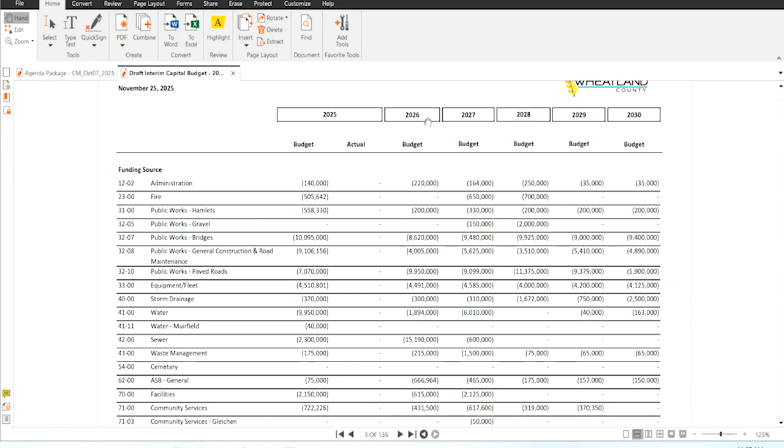So I'll just quickly touch on the summary at the start of the capital package that you received. So you see a summary by division, the total capital for the current year, the actual. This is the funding section, so that's why you don't see any actuals there right now, because we don't fund things until we do our audit for the current year. And then the remaining 5-year plan forthcoming here. So our focus right now is the 2026 one.

This is a summary of the funding methods. And then I'll just touch briefly, as we saw in the PowerPoint presentation, this is our list of capital projects with the criteria of deferrable with impact or the type of capital that it is. And we have some notes in here. So when you have time in the evening and you want to do some light reading, you can review this and it'll keep you up at night.

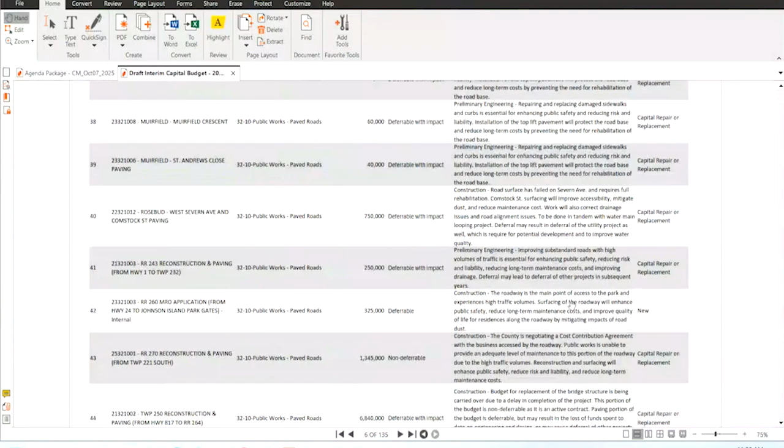Okay, so we'll go to the first section, first project page. To Harry, come up and talk about his project.

Morning again, Harry from administration. This project is fiber. We're looking to add a fiber line from the administration building to the agriculture building to public works. We did separate this because it's related to another project, but it's possible we don't have to use the full funds. There is an existing conduit, but we're not sure what condition it's in, or if we're able to fit a new fiber line, but we're looking to improve the connectivity. So this budget is contingent on the existing conduit not being able to accommodate a new fiber line. So we're looking to improve the connectivity between the three buildings. Let me know if there's any questions.

Seeing none, I'll move on to the next line. This is the usual IT equipment line. This year is a little special for computer replacement. Windows 10 is no longer supported, meaning if there's a security vulnerability, they're no longer updating it. So just a little note for everybody. We're looking to upgrade any machine that we're unable to upgrade to Windows 11. We're looking to replace, so there's a little bit more machines than usual that we will need to replace, but that's just what we're given. So other than that, the usual mobile asset replacement, phones and tablets that go on the vehicles, and then infrastructure assets. You saw some of the offsite improvements that we did last year, we're looking to continue that into the rest of our facilities. Let me know if there's any questions. Seeing none.

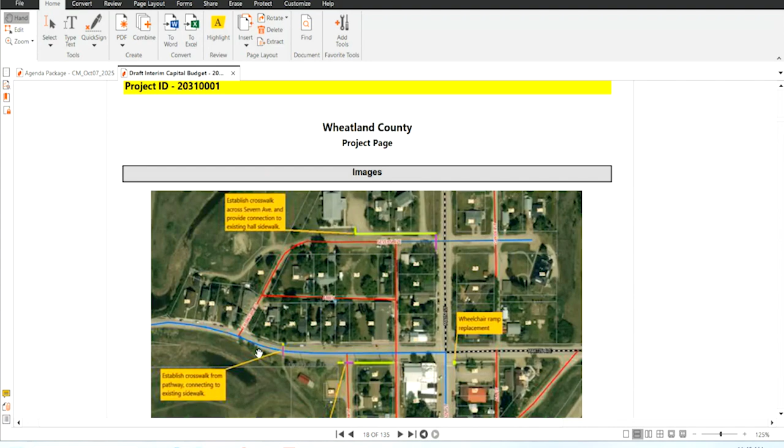There's a little image we put together for this year's. We kind of do the hamlets on a rotating basis — one year we'll do Carseland, next we'll do Gleichen, Cluny, kind of mix them up. So there's a big push in Rosebud this year — replacing with some wheelchair ramps, connecting the community hall to the rest of the sidewalk system that it's not currently connected to, and some crosswalks and things for the pathways that just walk out into the middle of the road. That's that in a nutshell. There's a big push in Rosebud this year, and you'll see that theme through here, because we haven't done a lot of work there the last few years as far as infrastructure goes. This will tie into some pathway stuff and some road stuff you'll see later on as well. Really, the big thing about grouping some of these projects together is because they are so small and so far out there in the middle of nowhere, we get a bigger bang for the buck the more we can do in one shot.

And the next section is gravel. There's nothing for this year within the gravel budget. We keep a placeholder on there for a future pit purchase, because that will be coming down the road at some point, as we are getting to end of life on some of our pits.

And then we get into the hot topic of the day, bridges — my favorite topic to talk about. I've spent a lot of time on it. I have some maps that I'm going to ask Shanna to hand out. It'll make it a little clearer for everyone to see the number of projects we have coming down the pipe for bridges. As discussed multiple times, and specifically in that report that came earlier in the year, we are ramping up spending on bridges. That's become a big focus. We recognize that it impacts the ratepayers, the network, businesses, and everybody. So we are ramping that spending up.

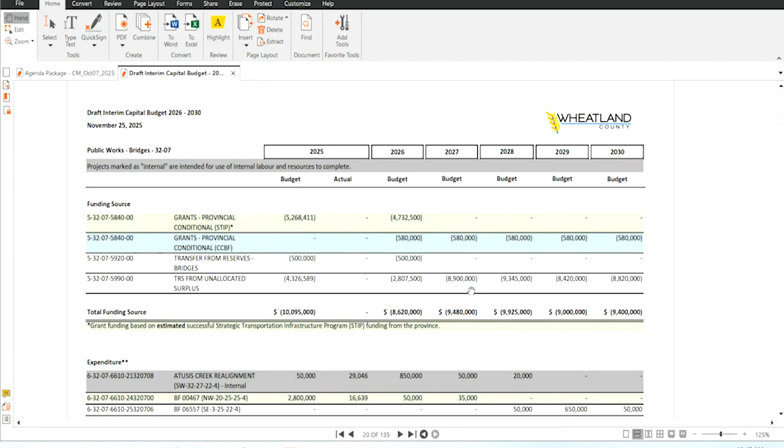Yeah. Some of those bridges, can't we replace them with culverts, or what's the difference in price of a big culvert to a bridge? No, that's a great question.

So for the newer councillors, the bridge file program refers to bridges and bridge size culverts. A bridge size culvert is anything that's 1,500 millimeter diameter or equivalent flow capacity - that could be two 1200s, could be a 1,500 or bigger. So we get up to like twin 4 meters, very large culverts.

The bridges, we have two classes - our major bridges and our standard bridges. Standard bridges are quite small, those really short ones you see. Most of those we can replace with culvert.

As a mandate from council over the years, we like culvert. It's cheaper, it's less maintenance, but it doesn't last as long. But when you factor it out over the life cycle of the bridge, generally that life cycle cost is cheaper, even though you got to replace them more often. So as a rule of thumb, we like culverts, we like to install culverts. We can install CSP culverts internally, which we can do for 40 to 50% cheaper than contractors on average. We're really good at it, we've been doing it a long time, so we like doing those.

Anything that's a structural steel plate or anything bigger, we contract out. Bridges themselves, definitely contract those out. So yeah, anywhere we can put in culvert, we will.

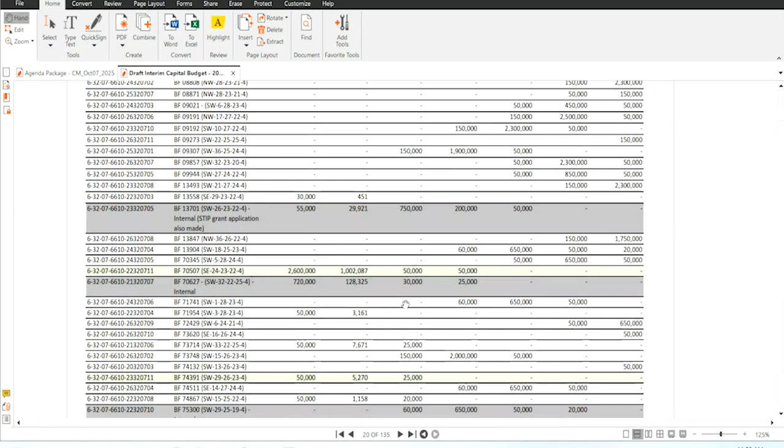I'll try and get through these before lunch, so I'll talk really fast. As you can see, the list has gotten quite long. The reason for that, these are all in various stages of post-construction, prelim construction, whatnot.

So quite a long list. Just what we touched on before, that spending total is going up just under 10 million a year for the next 5 years. So significant ramp up.

First one is the Atusis Creek realignment. This is to replace a 3,000 millimeter unregistered bridge file on Range Road 225 between 274 and 280. Also to move the creek away from the road so it quits washing the road, and improve the sag curve, because it's quite a dip through that section. Unregistered, again for the newer councillors, means it meets the criteria of a bridge file but was never registered with the province. As we replace these things, we register them, they're in the inspection system, getting inspected regularly. I think in the last 5 years we've found about 10.

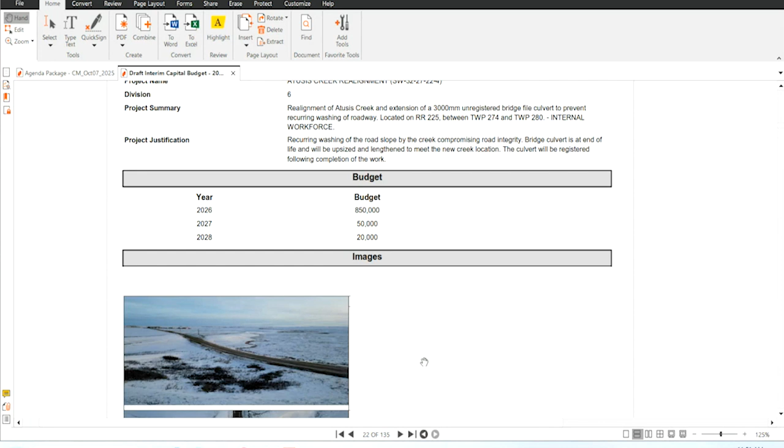So that adds to our asset management program. We got 10 more of these things that we didn't know we had. We're getting to a point where I think we've caught them all. So this one is to be constructed next year and completed with internal forces.

Bridge file 00467. This one is under construction right now on Range Road 255. This is post-construction for next year, and we do have a STIP grant on this one for 75% of the project.

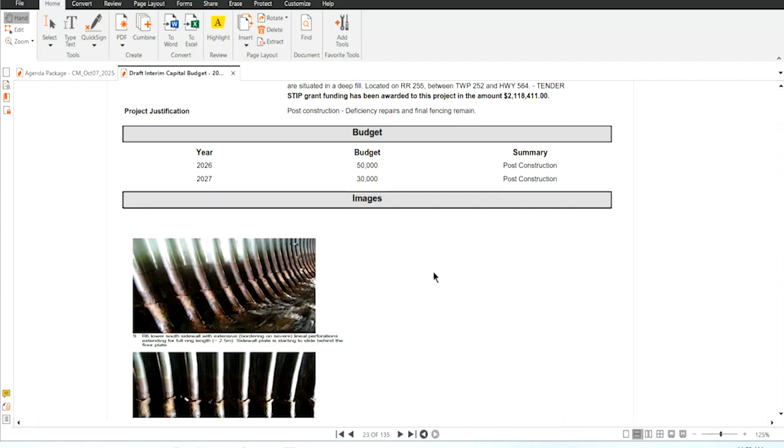So can I ask why, when we redid the road 2 years ago, we didn't do those bridges? That's a very good question. I think that road was done, I want to say closer to 10 years ago it was rebuilt.

At the time, when they inspected them, they figured they had more life in them than they did, I assume. I know we went in a few years back and put extensions on them. So again, at the time, they must have been in good shape, or at least they assumed they were. What happened is a recent inspection went in there and discovered that all the haunches of the pipes were totally rotted out and cracked, and so they were starting to collapse. As a rule of thumb, I replace everything as I go through a road project. Don't like going back, it's way more costly.

Sorry, go ahead. Through the chair, I just wanted to add something from an asset management perspective. As these are brought into the asset management program, one of the goals is to actually put asset classes together where they can look at the useful life of different assets that might be touching each other like this, and then make a plan of how we can be more effective with this in the future.

It could have been a budget concern at one time too. We don't know, right? It could have been discussed previously, I honestly don't know. Could have been an option available, but yeah, no, absolutely. It could have been at that time that it's going to be too much money to replace these. They're good for another 10 years. Let's deal with them when the problem comes up.

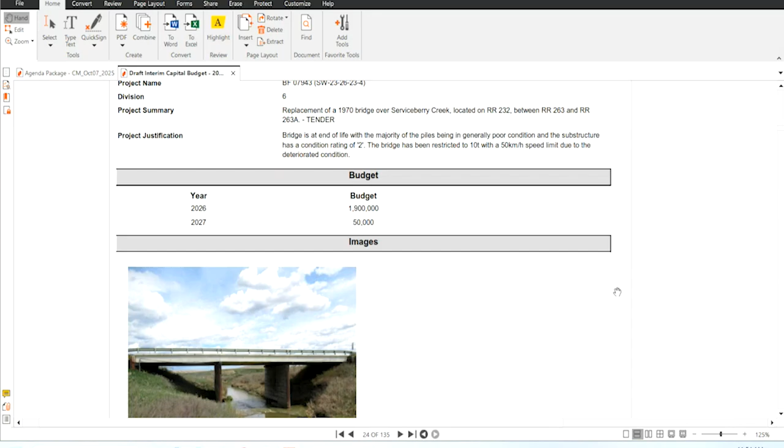The other thing I'll note is when we're looking at these bridges, we standardly replace them to get them up to a 9-meter width, which matches our 8.6 roads. And obviously the full C800 rating, so 83.5 tons, I think is the new rating that everything goes up to. So as things get upsized even more over the years, in the future, the bridges will be able to handle that.

Bridge file 8328, again a bridge over Serviceberry Creek. It's 1976 built, on Township 262 between 234 and 235. So this would be southwest of Rockyford on the Serviceberry. Preliminary engineering for next year, construction in 2027.

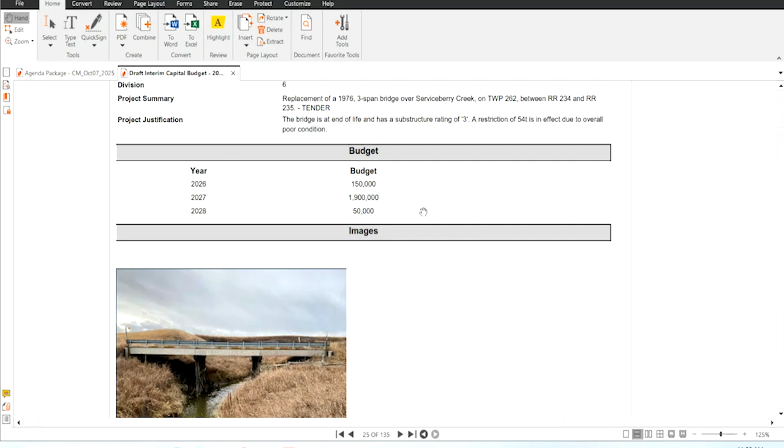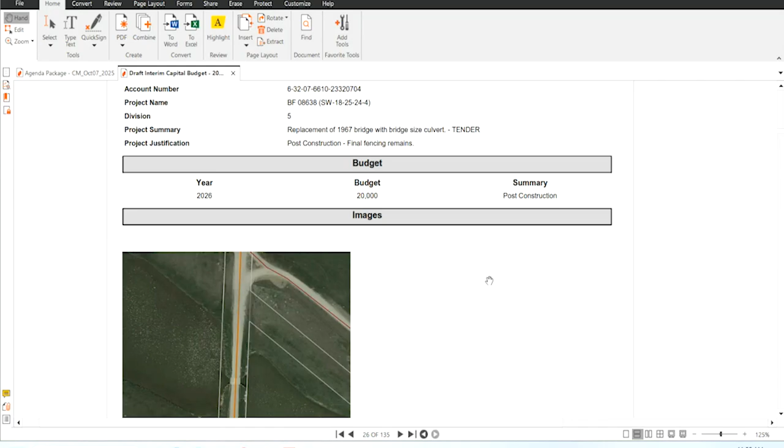Bridge file 8638. This was a replacement of a bridge on 250 north of Strathmore. This one's in post-construction, so it's just final fencing left on that one.

Bridge file 9307. This is a replacement of a 1954 bridge on Serviceberry Creek, again on Range Road 241. That would be Baintree for those familiar with the area. Prelim design as well.

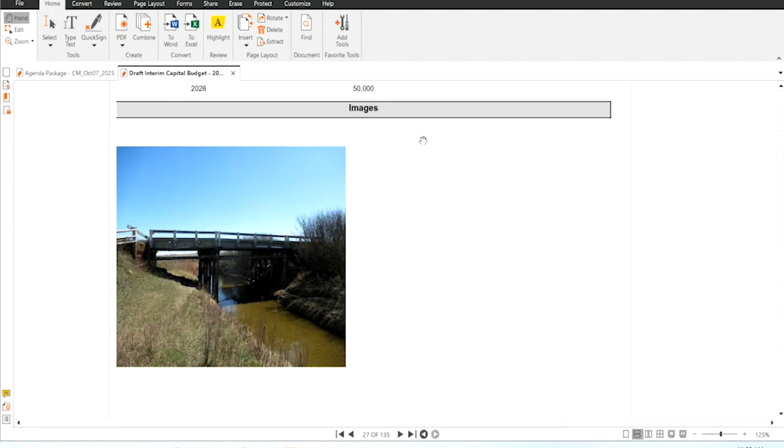Bridge file 13701. This is a 1951 wooden bridge over Crowfoot Creek on Township 234 between 222 and 221. This is for construction next year. It has a 2 rating currently and is restricted to 10 ton. This will be an internal project since we'll be installing twin 3-meter diameter culverts, and we applied for a STIP grant on this one as well. One of the nice things about the bridge STIP grant is you can actually do the work internally and recoup your costs for it, where you can't with the road programs or any of the other STIP grants, only bridges.

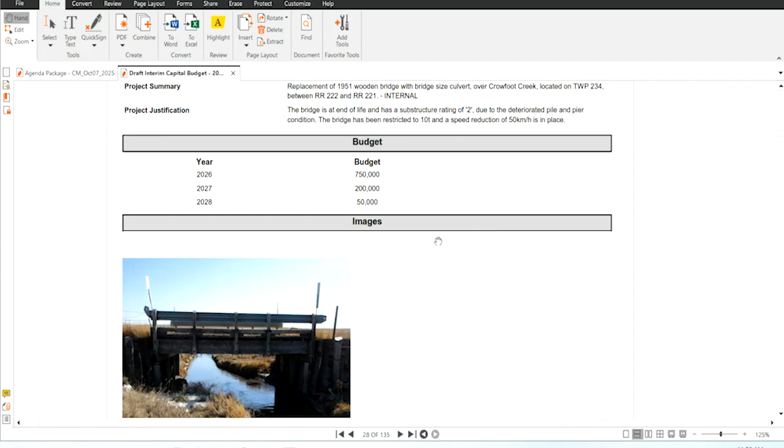Bridge file 7507. This is post-construction. This one just wrapped this fall, and it was replacing a 1953 bridge over Crowfoot Creek on Range Road 220.

Bridge file 7627. We just finished this one internally. Replacement of a 1957 culvert on Range Road 255 north of Carseland. So post-construction next year.

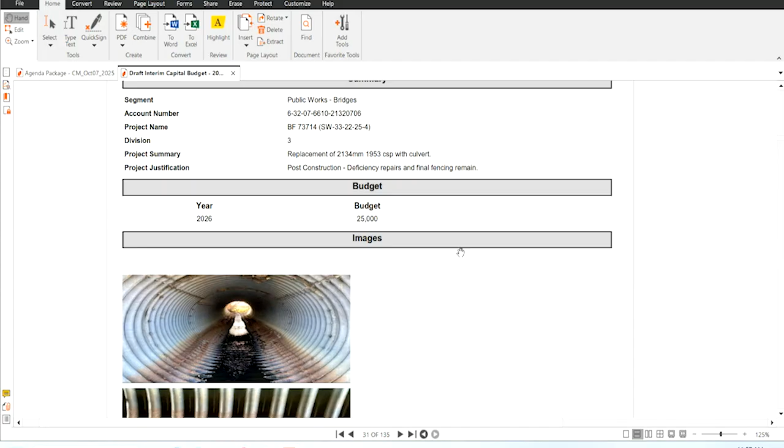Bridge file 73714. This one was a replacement of a 1953 culvert right by the Oasis campground. That was completed last year with internal forces. So post-construction again, just fencing.

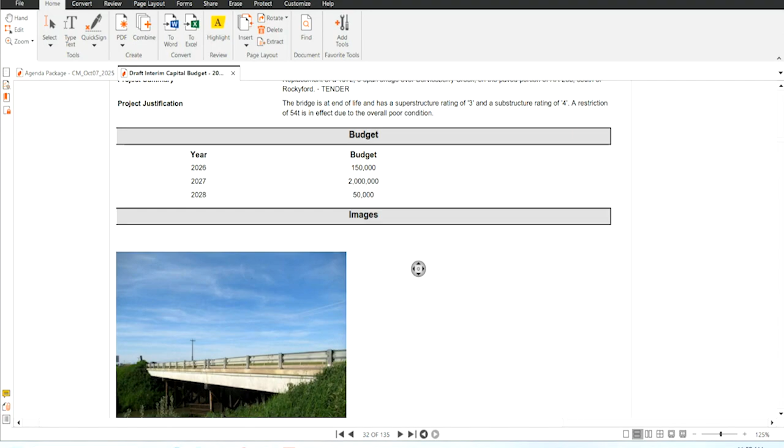Bridge file 73748 was replaced with a 1972 3-span bridge over the Serviceberry on Range Road 233 south of Rockyford. This is the bridge on the paved Rockyford Road, just south of Rockyford. This is the one we've heard most about. I think it affects a lot of the agricultural producers in the area trying to get to the seed cleaning plant and everything else. So even though it would be an earlier planned replacement, we want to move forward with this one just because it is such a high value to the road network and so well used. When I say early replacement, I'm talking 2 to 3 years, not 10 years.

When you're rating these bridges to 1, I know it's pretty obvious, but being that the weights are so restricted again, downgraded, does that affect the rating at all? The weight restrictions are a resulting factor of the condition rating, not vice versa.

What I've done is taken all of our projects and looked at what are the worst bridges that need to be replaced now, and what are the ones that might have waited a year or two, but are restricted and are affecting the road network the most, and added those in as well, where I have room. You'll see some of what we're replacing isn't restricted, but that's because it didn't get restricted, it's just at end of life, not worth fixing, needs to be replaced. So you get both streams happening at the same time.

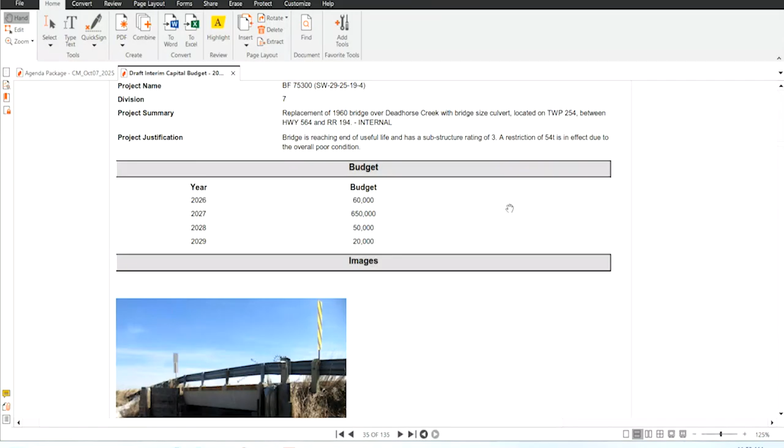Bridge file 75300. That's a replacement of a 1960 bridge over Deadhorse Creek, located on Township 254 between Highway 564 and Range Road 194, just east of 56. That is prelim for next year.

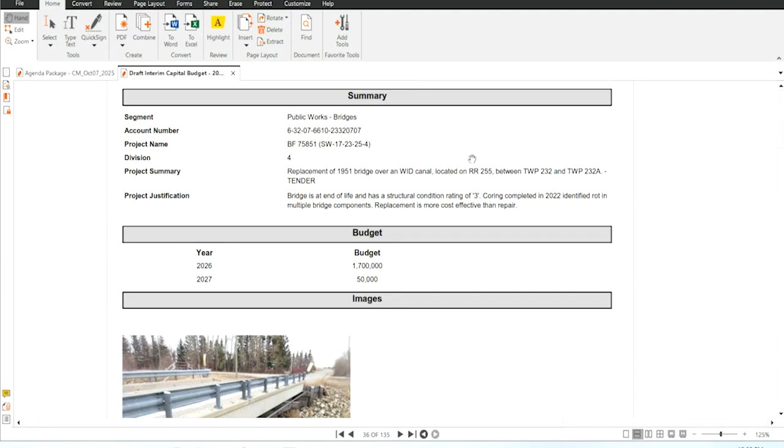Bridge file 75851. This is a construction project for next year, installation of twin 3,600 millimeter pipes, quite large, over the WID-A canal on Range Road 255 between 232 and 232A. So that's construction.

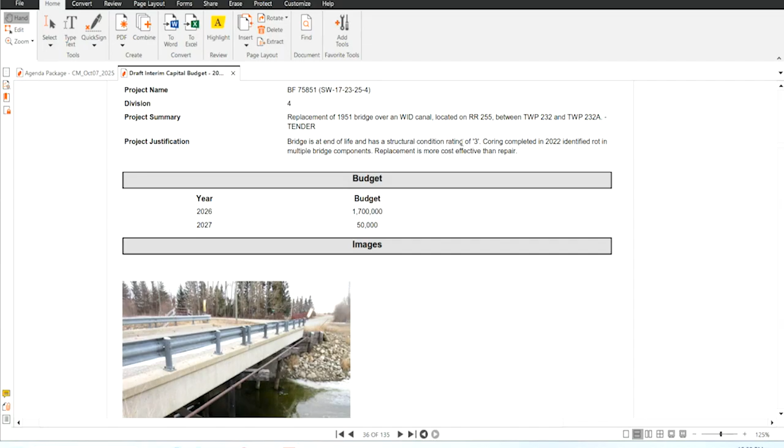Yeah, this is the bridge at my place, and a crazy little question. These are culverts, huge culverts, which are good. And the canal going past our place is used by a lot of summer kids floating the canal or adults drinking small amounts of rum. Are the culverts fairly safe to pass through, or is that not an issue? Just a question.

Well, we wouldn't recommend that you float through them. I don't think WID actually permits floating within their canal, so just something to point out. There are several of these bridge-sized culverts along this canal. Most of the bridges along A Canal from the Langdon Reservoir coming out are due within the next 5 years. And almost all of them, I think all but one that I can think of, are going to be twin culverts going forward.

And we applied for a STIP grant for this one as well.

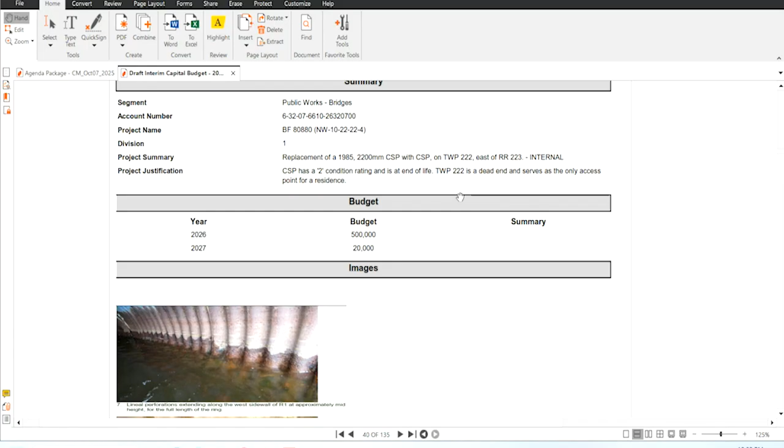Bridge file 80880. This is a replacement of a 1985 culvert on Township 222, east of Range Road 223. It has a 2 rating, so very poor condition. We'll be doing this internally. It's a small WID canal that accesses a single residence, and this is their only way in and out if it fails. We'll get that one done next year as well.

Any questions? You were mentioning that the culverts have less of a lifetime span. What is the expected lifespan compared to the other bridges you're replacing right now, which are 60, 70 years for some of them? What do you expect out of the culvert with the material you're using right now? Generally, the life cycle for a culvert is assumed at 40 years as the average.

Bridges are 40 to 50 years, but can be extended through regular maintenance and everything else. So I wouldn't say it's standard to get over 50 years out of a bridge generally speaking. But the materials are changing, so I think the life cycles are getting up to around 60 years now. But still, with the lower overall cost versus the environmental impact versus maintenance of the bridge every single year, getting inspected on the 52-month cycle all the time, guardrails, signage - there's just a lot that goes into bridge maintenance which keeps ramping those costs up year over year.

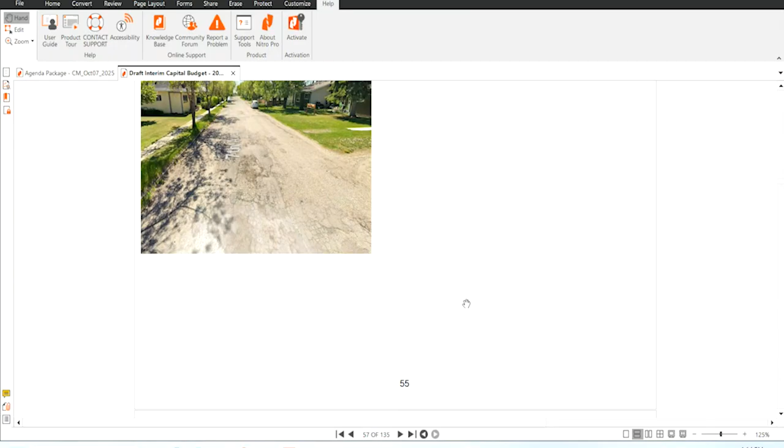The west side of town, we did review as well, and it was in better condition, so we're not recommending to do that at this time.

Muirfield Kautz Close paving - this is just prelim. I'm sure as most are aware, we did the top lift paving and concrete repairs throughout Muirfield this year. Had really good success with that project, very minimal complaints. We're really happy with it. We learned a lot from some of our projects in Carseland and took notes and hopefully did a better job. I think everybody was really happy with it.

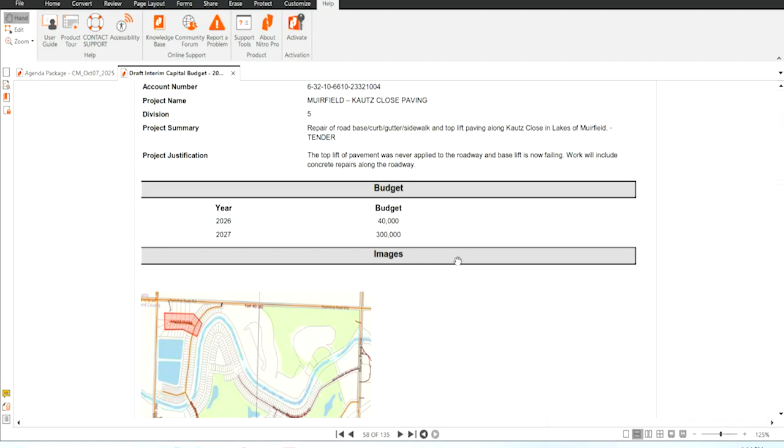So with Kautz, these next 3 projects within Muirfield are prelim for construction in 2027. Again, looking at the road base for repairs, concrete repairs, that sort of thing, doing the top lift. So that's these next 3.

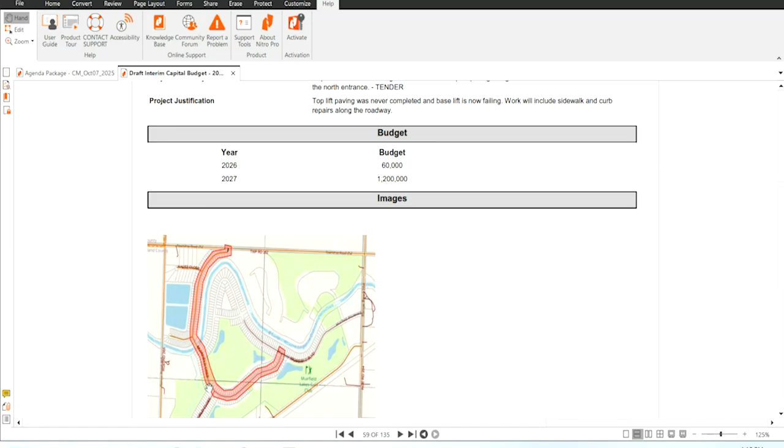So the next one, within the Rosebud Sidewalk Program, this one ties into that as well. This is the Severn Ave West and Comstock Street paving. This also ties into a water line looping project we're looking to do in Rosebud this year, which my colleague will touch on later. We'll be looping the water line between Comstock Street and Main Street for water quality, fire flow, and development. We know there's proposed residential housing coming to MPC in the future, and they're waiting for this water line looping.

Severn Ave West is very badly deteriorated. We talked about it a bit last year, and did some extensive cold mix patching to try and get it through to this year. It's in dire need of resurfacing, so with that comes the sidewalk project along there as well. In Comstock Street, we have drainage issues on the south end, as well as valve replacements needed on the north end. So we're looking at paving that whole loop around Comstock Street, because we currently dust control it every year and the buses use it to drive through. It'd be nice to get all the utilities in place and paved so we're not digging things up twice, and the pathway and sidewalks will all tie in nicely and get it buttoned up.

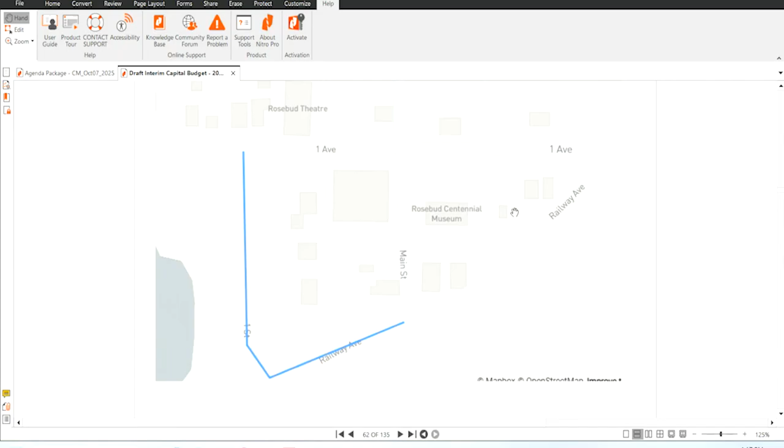The traffic counts on this road are averaging 400 to 700 cars per day, peaking at 746 vehicles per day, so quite high traffic. The threshold we use for break even on paving is about 400 cars a day, from Alberta Transportation studies, and that's where your maintenance versus paving payoff is. This road is well and above that. It's quite a narrow road, and anybody who's driven it in the winter can attest it's quite hazardous, or can be quite hazardous.

It also has a 75% ban on it, and there's a lot of industry down there, with campgrounds and a couple other things, so it's a main access for a lot of traffic. That industry traffic pushes off onto the side gravel roads because they can't use this road due to the 75% ban when they're hauling out of there. It's putting pressure on the side roads, creating greater traffic that we're then dust controlling through our program. So the hope is to get this main artery reconstructed and paved, and the traffic will probably increase beyond what we're already seeing.

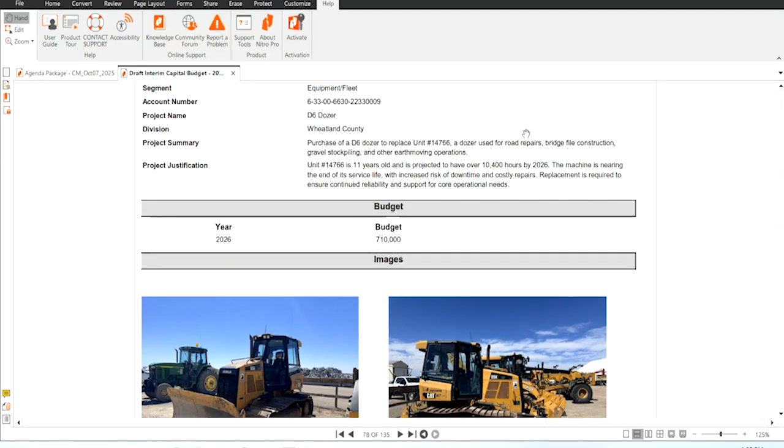The next one is a D6 dozer, to replace our current unit, a D5. It's 11 years old and will have 10,400 hours by the time of replacement. It's also coming up where it needs a full undercarriage replacement, and a motor's probably not far behind. So better to get rid of it now before we sink a couple hundred thousand dollars into it.

The next one isn't a replacement, it's a new unit we're hoping to purchase. It's a snowblower unit to go on the 938 loader. The reason for that is we currently have a snowblower unit that goes on a John Deere tractor. It's not great—it's good for shooting windrows, but not good for breaking through snow drifts and stuff.

A few years back we had about 12-foot drifts on some of our roads out east, and it really struggled to be of use out there. So we're hoping one of these types of units will have a lot better success breaking through areas of high and severe drifting.

Also, the current unit we have isn't high enough to shoot into the back of a truck, so it's kind of useless for cleaning streets within hamlets and whatnot. We're hoping to use this new unit for that as well, which will speed that up and make it more cost effective to clean roads within hamlets.

We're not looking to get rid of the other unit, because redundancy is a big part of what we do. It would still be a backup in the event this broke down and we needed it, or if we had to run two units out on the roads, we could do that.

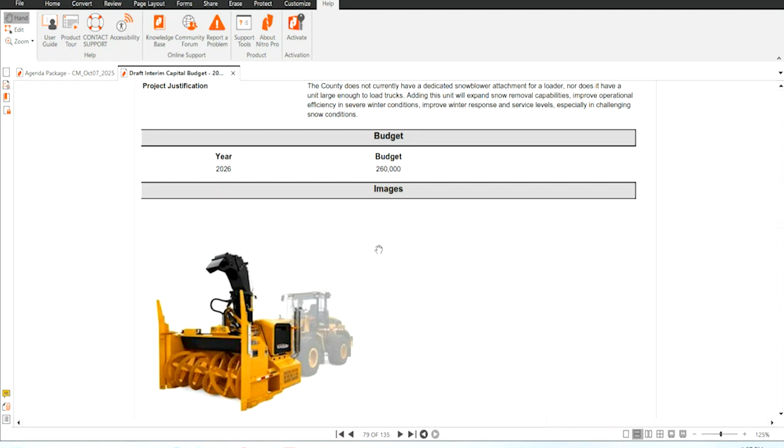Effluent waste tank trailer—this is a new unit as well. I say new, but we're going to buy used to try and keep the cost down as much as possible, because this is a stopgap for hauling effluent out of Muirfield.

We have two of these trailers currently. We run one full-time driver, and we are running our second unit three days a week right now to try and keep up. And that number just keeps going up year over year.

We know we're a couple of years at least away from the lagoon solution, so we don't want to hit a point where we can't keep up with the waste we're seeing. The problem we're having currently is if a unit breaks down and goes in for service, we can't haul with it—now we're running overtime, running Saturdays, trying to keep up.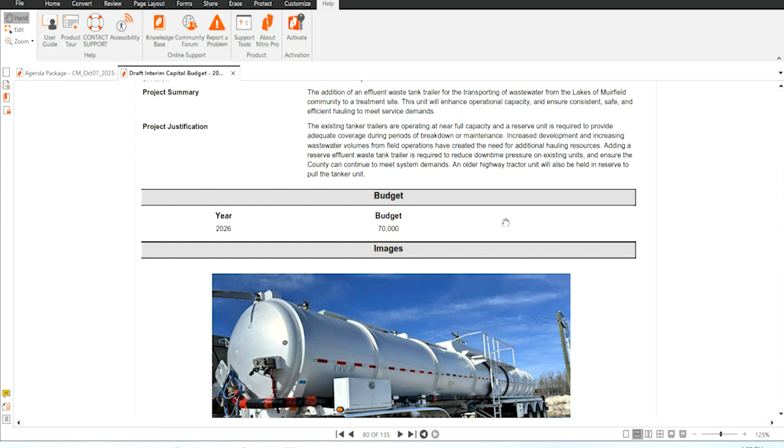So we'll be purchasing this third unit, and then we'll bring an ask back to council later for an additional position to operate it. We're running two trucks full time, and the third would be reserved for downtime, repairs, and servicing. But again, we're buying a used unit to keep the cost down.

How much does that cost us to run them—or buy them? Do we have that broken out? We have those costs, but I couldn't tell you off the top of my head. It's a lot of numbers on the budget day, but we could bring that back to council as well.

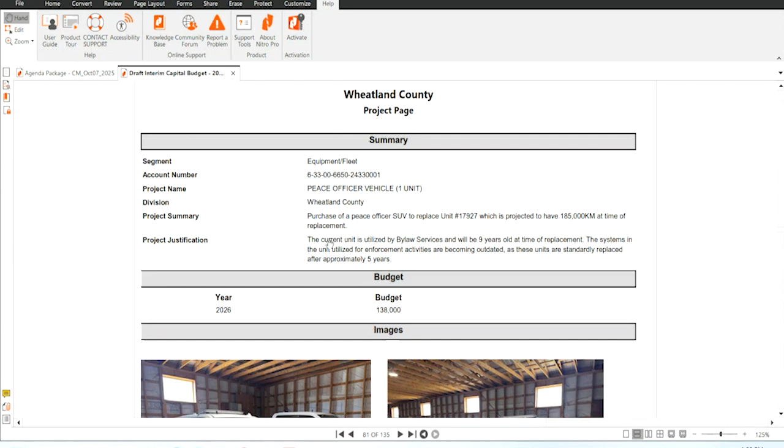The next one here is a peace officer unit—a replacement. These run on a bit of a different timeline, typically 5 years and 185,000 kilometers, because the computer systems within them get outdated. We try to keep everything up to date so it works with what the RCMP have and what we have, and it can be $20,000 to $30,000 to upgrade those units. So we replace them every 5 years.

The current unit we're looking to replace will have 185,000 kilometers, but it's already 9 years old, so it's kind of served as a backup unit. Looking to replace that one.

Roll-off bins—I believe Joel touched on this earlier, so this is a carryover. We are in the middle of refurbishing bins. We ended up purchasing 47 bins from Drumheller Waste Association that they were no longer using. We've got about 6 of the 47 refurbished to date, just because we've been busy with other things, but we will have this program up and ready to go for April of next year.

We have 2 hook lift trucks that should be here before the end of the year to run these bins. We're moving this service in-house, and we anticipate we're going to save somewhere between $200,000 to $300,000 a year on our operating budget by doing this internally. So huge savings, and that should translate to savings to the villages as well, just for the bin hauling.

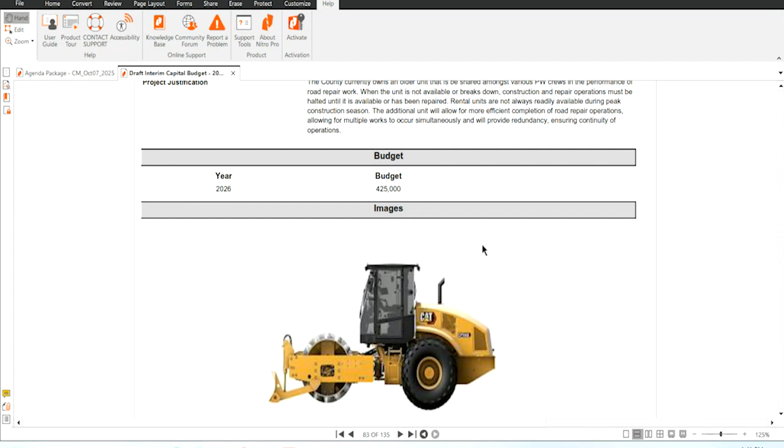That unit's been down for 8 weeks now, so we've been scrambling to rent machines and get machines in place. Because we rely on compactors for everything we do, for culverts and roads and everything else, we basically need one on almost every single job that we do. So it's a very key piece of equipment and we only have the one. Looking to get another one to provide that redundancy and keep everybody running more efficiently and quicker, so we don't stop projects or delay projects.

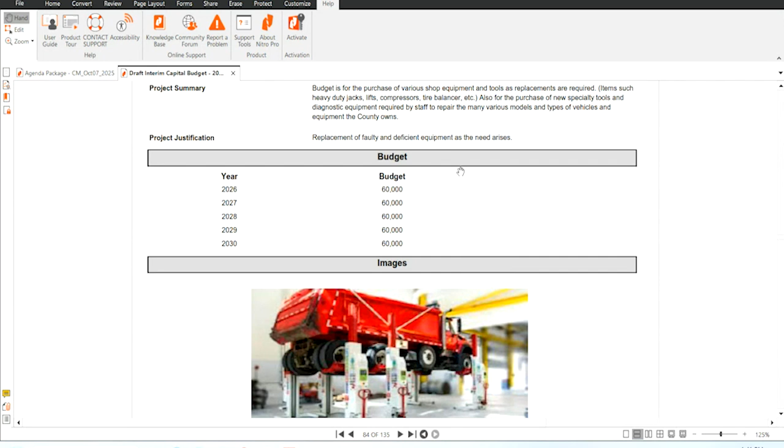This equipment and tool budget is a year-over-year budget that we maintain just for general shop replacements, compressors, pressure washers, hydraulic jacks, things like that don't have a standard timeline and they blow up, and then we need to replace them. So it's 60,000, sometimes we use it all, sometimes we use half of it, just depends on what breaks on a given year. High dollar items, also used to buy new diagnostic tools and things for all the different equipment as things change over the years, upgrading stuff.

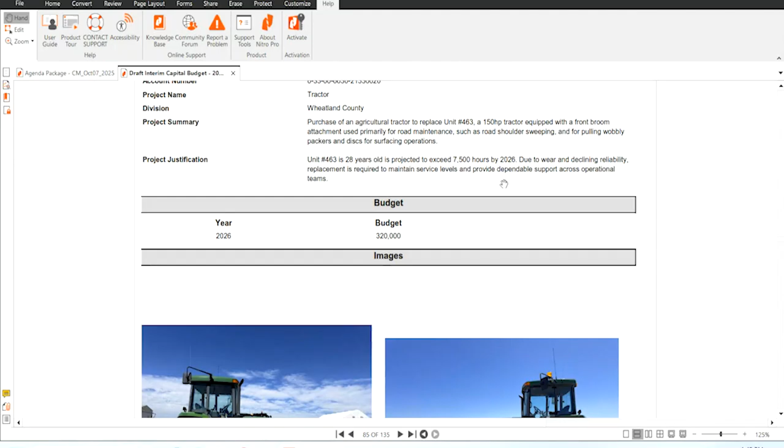The next one is a replacement of a 150 horsepower tractor. This is used by the surfacing crew, primarily for sweeping shoulders and whatnot in the spring along the paved roads, and also used for MRO application, running discs and pulling wobbly packers, that sort of thing. This current unit is 28 years old, 7,500 hours on it. So there's one where it doesn't accumulate a lot of hours every year, but when we need it, we need it. And obviously the age shows that we've kept it a long time.

The next one is 2 Tridem belly dumps. Both of these units are 12 years old and they have around 400,000 K on them, so just end of life, time to replace them. We're starting to get cracks and things in the frame, and the airbag systems on both of these, I believe you can't get parts for anymore. So it's been kind of a problem, and we're hoping to not redo the entire airbag system on both of them before we have to sell them.

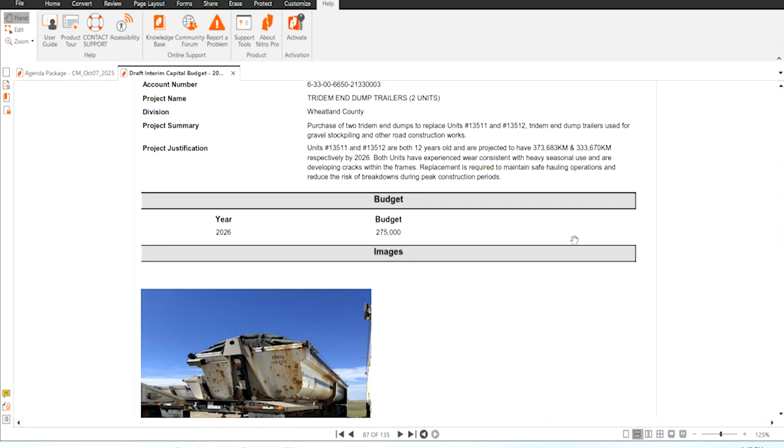The next 2 are 2 end dump trailers, triaxles used for stockpiling by our gravel crew and for other repair operations. Again, both of these are close to that 350,000 K mark. We do have extensive cracking in the frames on both of these, so we've done a lot of welding on them in the last 2 years and continue to see problems.

Our next one here is a new unit, a wide angle mower. I'm looking to purchase a 14-foot mower. We did obtain a couple more of these a couple of years ago, and so we're running 2 mowing crews now. So we have 5 mowers for 4 operators. Again, when one of these units goes down, it's usually for 6 to 8 weeks because it takes so long to get parts. So again, looking for redundancy, replace one of the older units and put a new one in there for operational use, and then the older one will just go in as a backup when we need it.

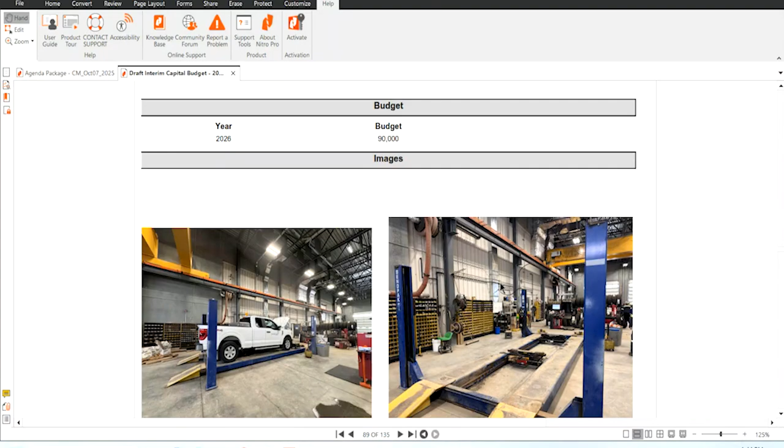The next project is a 4-post hoist. This has replaced our shop hoist for doing oil changes, servicing of our pickup units. It's very integral to our operations. This one is currently about 20 years old. We had it inspected this year and it basically barely passed, to put it lightly. Passed with the condition that we need to replace it next year, or they're going to not pass it again. If we go to fix it, it's going to be about $20,000 to $30,000 to replace the rams and everything on it, and you're about 80,000 for a new one. So it doesn't make much sense to try and get it through when it's already 20 years old. It's more cost effective to get a new one.

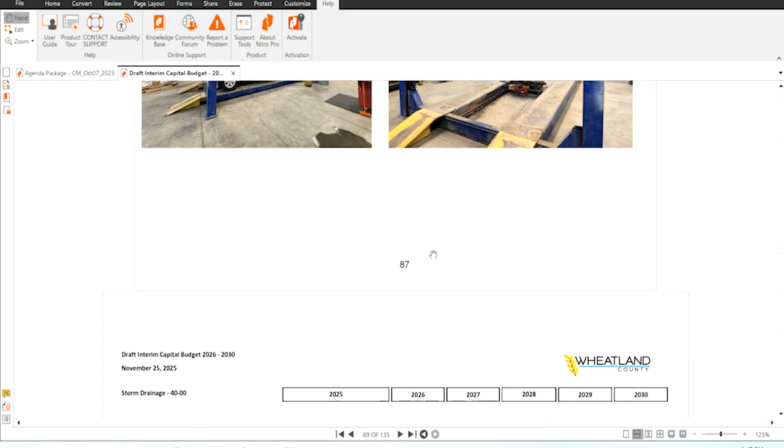Also, we need to purchase a heavier one anyway, because our equipment's gotten bigger. As with everything, the trucks get bigger, and the buses and the handy buses and all that stuff we do, and the plow trucks with the sanders. They just keep getting bigger and heavier. And that brings us to the end of fleet.

There is one project coming on the December budget which you're not seeing here, and that's for gas pump replacements. It's not on here because it came up very last minute and we're still getting quotes, but it'll be about $80,000 to replace the pumps here at the main shop. Basically they are end of life and we can't get parts for them anymore, so we have about 4 to 5 gas pumps that we need to replace. That was kind of a surprise, but we've gone through the rest of our inventory on gas pumps and put a life cycle and cost to each of them, so we'll be more prepared going forward.

Any questions on fleet? Perfect, I'll turn it over to Jose. Thank you.

Good afternoon, Council. Jose Pollo Cuervo. I'm the Manager of Technical Services here at Wheatland County. I oversee the county's water and wastewater operations and capital projects, as well as all the report writing that goes on in the background.

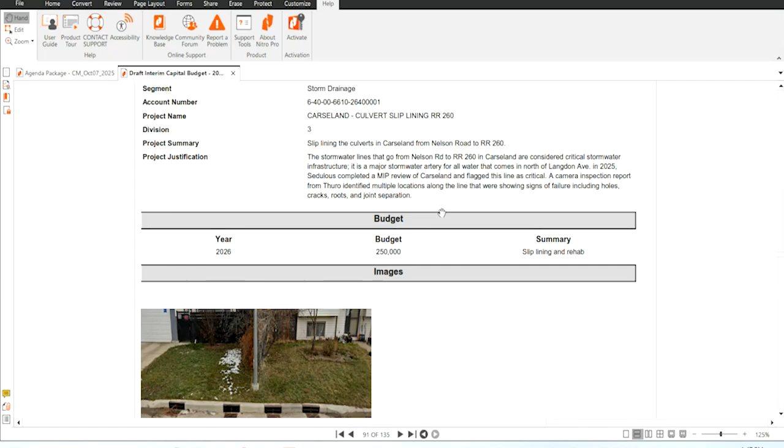Let's go through storm drainage. So we have 2 projects here. The Carseland Culvert slip lining on Range Road 260 is one that's come up recently. This is considered a major artery for stormwater in Carseland. It all comes down south and then goes underneath a few of these houses across the highway. We've recently done some camera work and it's identified that this is in dire need of repair, so we've got $250,000 in the budget to do slip lining, which is where you essentially put another pipe through and reinforce it.

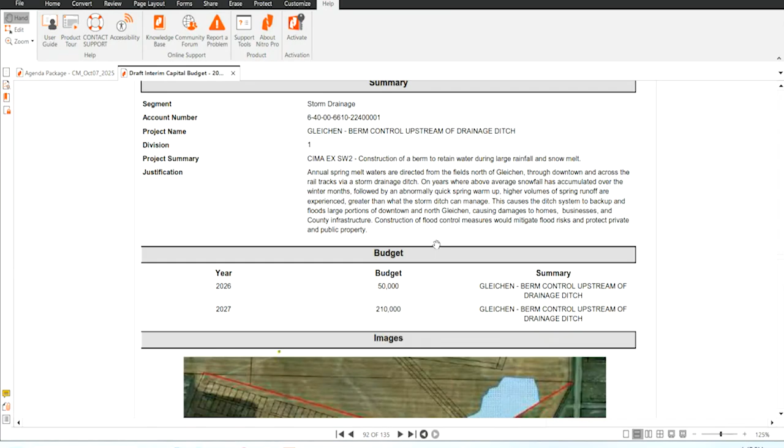Next up is the Gleichen berm control upstream of the drainage ditch. This is one every year with the snowfall, all of the stormwater essentially flows south and goes into Gleichen. Next year will be the engineering cost to construct a berm, just so we can control the flow of that stormwater as opposed to it flooding over as it currently does. Then in 2027 would be the construction. And that's it for storm drainage.

Just a quick question on that one. So the person that owns the land north of that, the water would back up onto their land, it looks like. What do we do about that? If his land is flooded because we've built a berm, is that addressed? Yeah, so that would be addressed in the engineering of it, for sure. We would coordinate with the landowner and hopefully... Sorry, through the chair, just to supplement there, we actually are the landowner immediately north. Well, that solves that. Thank you.

There we go. Any other questions from storm? Nope, okay, moving on. So next up is water.

Similar to the STIP grant funding, we also have the water equivalent grant funding called the AMWWP, or the Alberta Municipal Water and Wastewater Partnership. I've got right now 4 projects being submitted for grant funding, and similar to the STIP, we don't know when we're awarded it, but it follows the same kind of rules. Unfortunately it does require more information up front, so I am still working with my engineering team to put those together. I will outline which ones we're applying for, though.

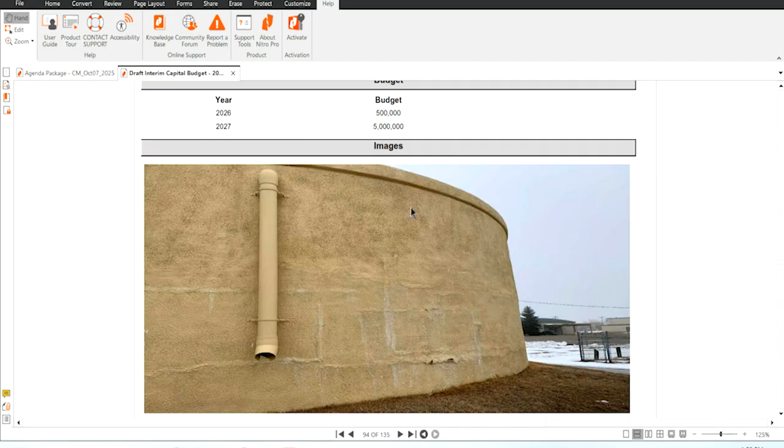So to kick things off, the first one we're applying for is the Carseland Water Reservoir Replacement. This is a project that we initially did a study on in 2021, since there were quite a few cracks showing and some mildew. The study came back that we should just patch it up and take a look at it in 5 years, and 5 years has now come. So next year we've got $500,000 in the budget to take a look at the reservoir. We predict that the cost of repairing it will be close to the cost of replacing it, so next year we will be looking at the engineering for it just to do that feasibility assessment.

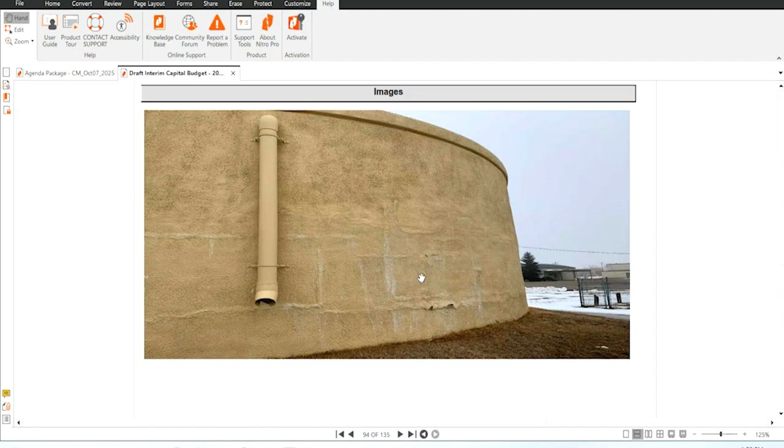Tied closely to the Carseland area is the distribution header replacement. This one has a bit of a backstory in that Carseland used to treat their own water at a water treatment plant. In 2014, it was converted to a pump station since the water is now being pulled from Speargrass. So this water treatment plant is now just a glorified pump station. A lot of it has been demoed, but the basement just operates as a distribution center.

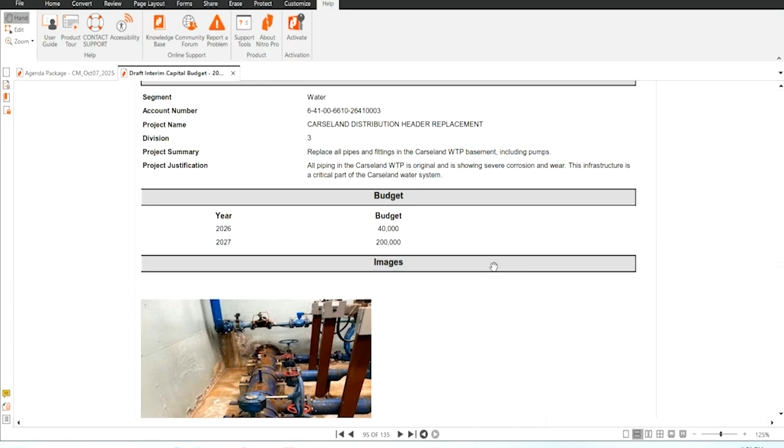So with that, the project here is to do engineering for next year. This one is also being submitted for grant application, and our engineers have recently done a cost analysis on this. If we were to replace the reservoir, it would be very cost effective to also add a booster station to that, replacing this pump station. So this is something my engineers are currently looking at, putting both those projects together.

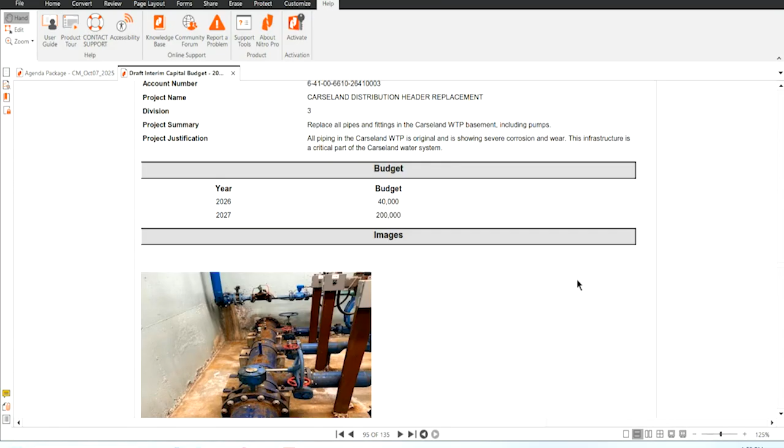Through the chair, yeah, so just a small section right beside, because the idea is that we also own the land across the street from the water treatment plant. So we build the reservoir and then just a small booster station right beside it, but not some large water treatment plant thing that we're currently working through right now.

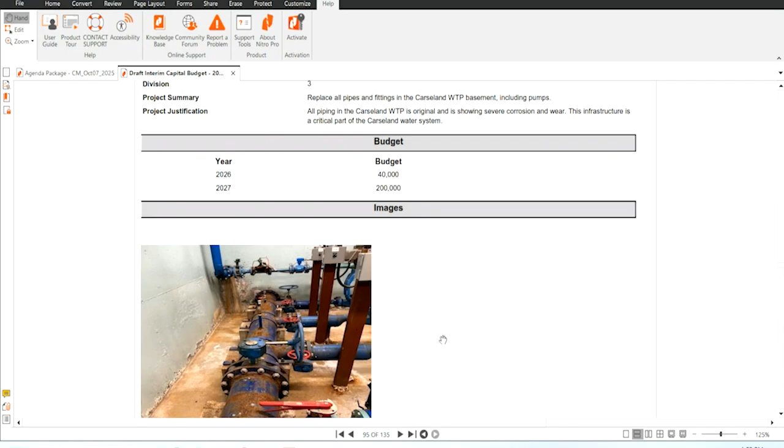So when you say that's original and it doesn't look good because there's a little rust on it, is there a way of measuring the thickness of that steel pipe still? Is it compromised or is it just ugly? And then how long ago was it built?

Through the chair, yeah, we actually got a study done by McElhanney. They did a non-destructive test 3 years ago, and very similar to the reservoir, they told us to look at it again in 4 or 5 years. When they first did the study, they found that it wasn't integrally damaged or anything. There is corrosion, but it is somewhat surface level. So the engineering will be done for next year to reassess how damaged the header pipes are.

Next project is the Muirfield raw water aeration. This is a somewhat recent event where residents of Muirfield complained about cloudy water, which all came back to higher manganese levels, caused by low oxygen in the water. A way of solving that is to essentially force air into the water through aeration. So this project is to aerate the water and force air through the raw water reservoir. That one has $350,000 budgeted for 2026.

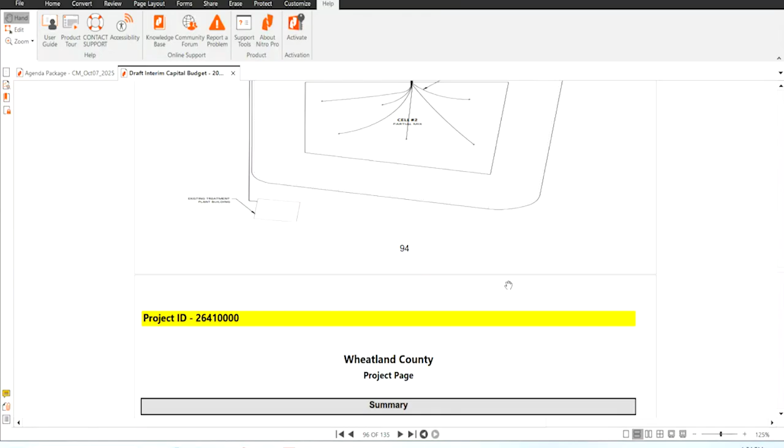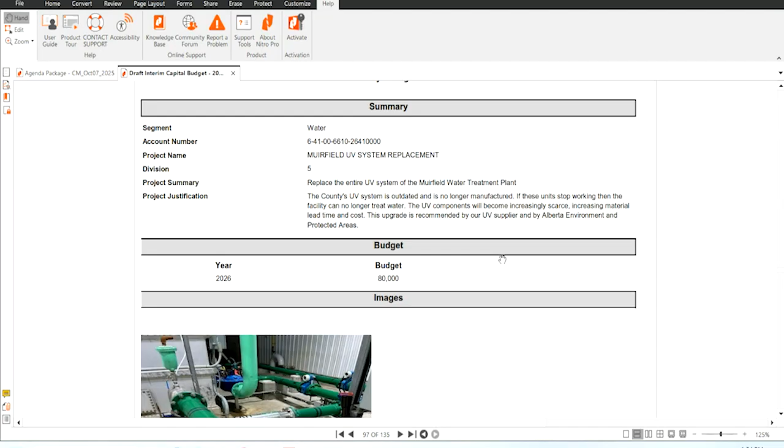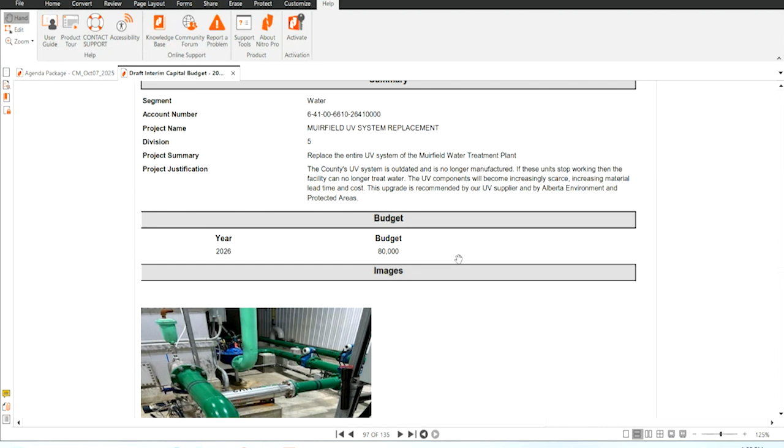Next up is the Muirfield UV system replacement. This one follows a similar story to Cody's bridges in that there's essentially a bubble or a wall coming of infrastructure costs, and these UV systems at Muirfield and Speargrass are both now outdated. The UV system is incredibly integral to the treatment of water, and the one we're currently using is no longer manufactured. So this is more a proactive measure as opposed to reactive, because it would be quite detrimental if anything happened and we couldn't replace it at the water treatment plants. This project is also being submitted for AMWWP application.

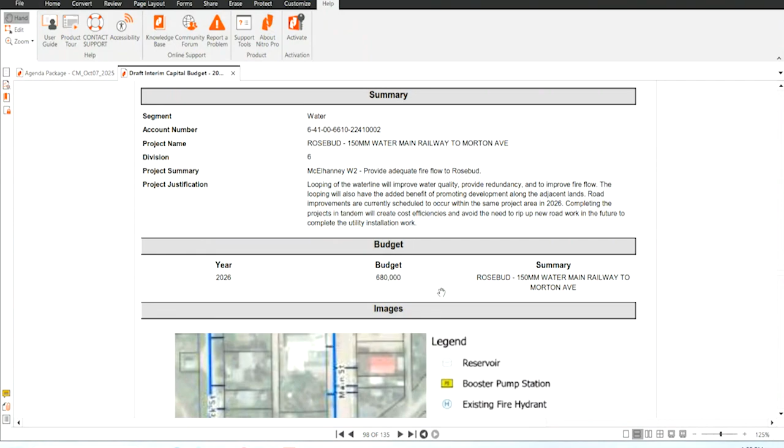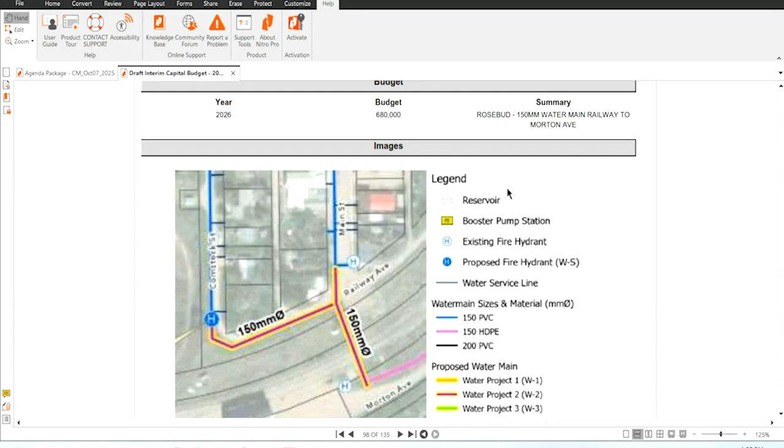Next project is the Rosebud water main looping. This is one that Cody had talked about earlier as well. While we're doing some of the road work, we're also going to be looping the water line. As Cody alluded to, it's to help with water quality, fire flows, and a bunch of other benefits. Cody and I will be working on this one, both of our departments, with $680,000 to do a water main looping here, which will also help support some developments we're expecting in Rosebud.

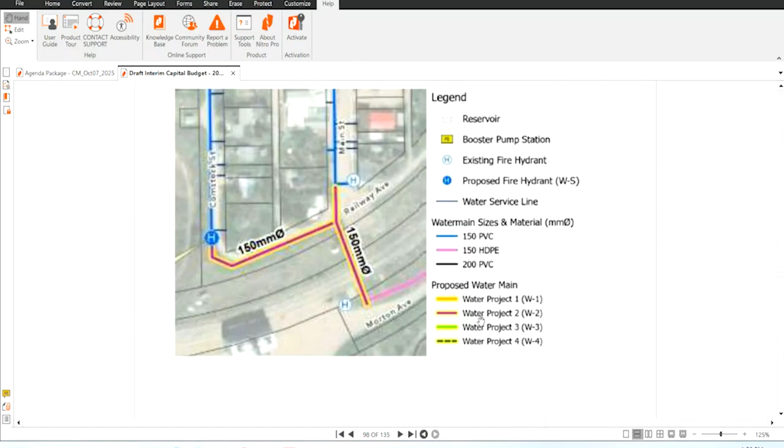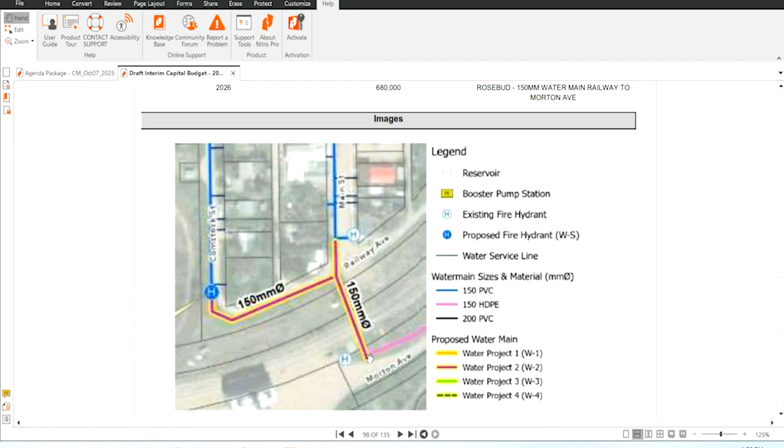The railway tracks, sir? Through the chair, yeah, this is the old railway tracks. This is the sani dump. I need to confirm if it actually crosses this or if it just loops up here. I'll come back to you on that one.

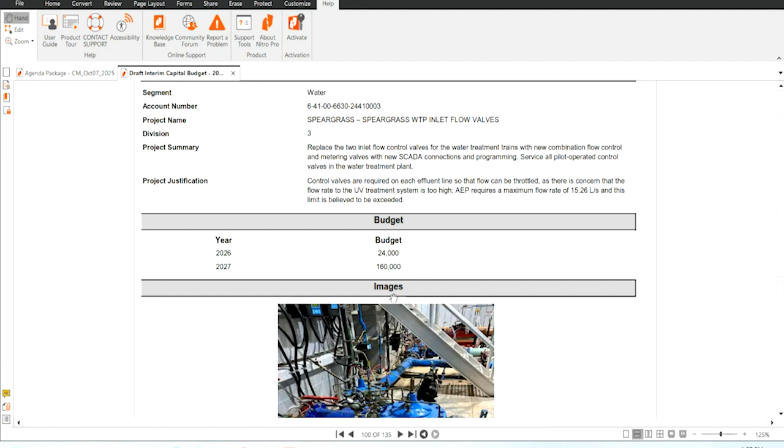This is a project, the Speargrass water treatment plant inlet flow valves. This is a project that we're also applying for grant funding. This is to replace our current flow valves so that they can work with SCADA.

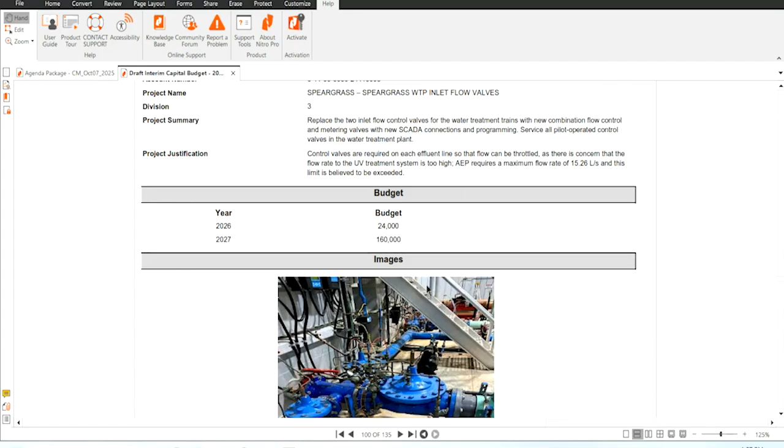A project that we had this year was to upgrade our SCADA program, and this is something that was identified in that. There's some upgrades that could be done here, and I believe there's some corrosion that my water operators have noted here.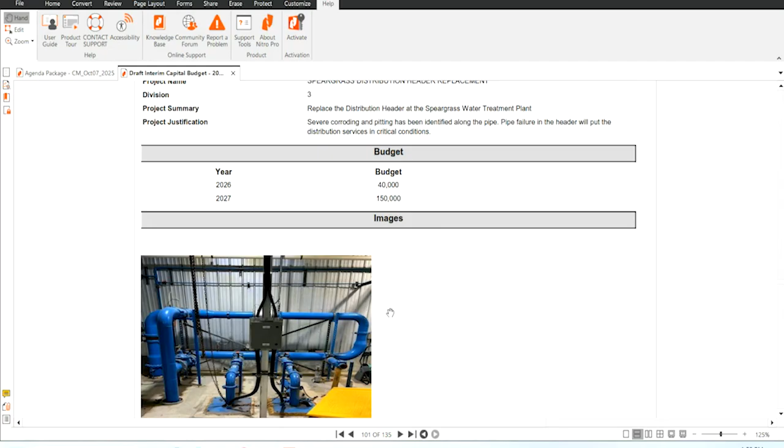Next up is the Speargrass distribution header replacement. This is one that, similar to Muirfield's header replacement, we're finding significant corrosion.

All this being said, the water plants right now do not have an asset management system tied to them. So something the county is doing next year is to have an engineer come in and assess the life expectancy of every pipe inside our water treatment plants. Right now, what we're finding is that almost all capital projects related to inside the water treatment plant are quite reactive as opposed to proactive.

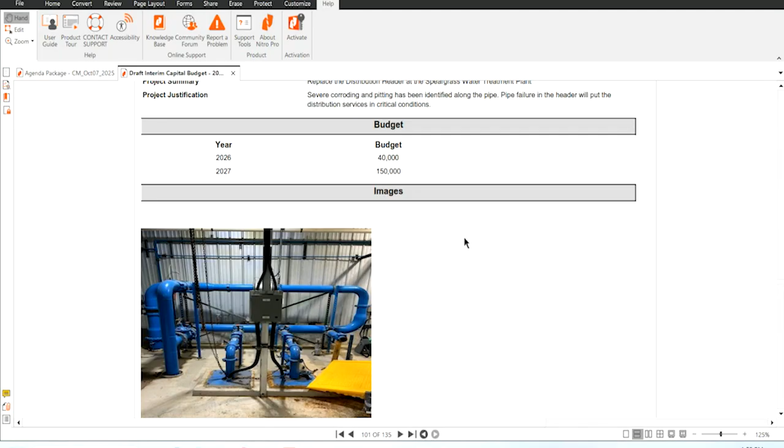And so this is one that we found. You can actually see here, there's a missing pump. There's supposed to be 3 pumps. It's just something we've caught quite late, in that there's quite a bit of corrosion. So when we took that pump out, we had the divers inspect the other pumps and the other pipes, and they found that they were quite corroded.

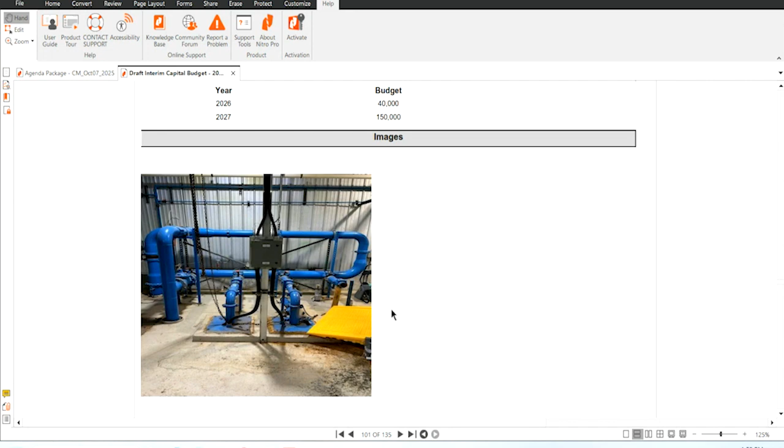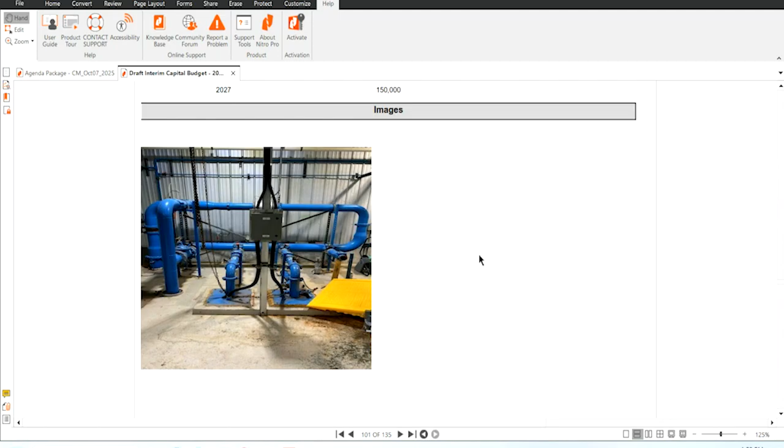So this project has 40,000 budgeted for engineering and then 150 for construction. And it's also being submitted to the AMWWP.

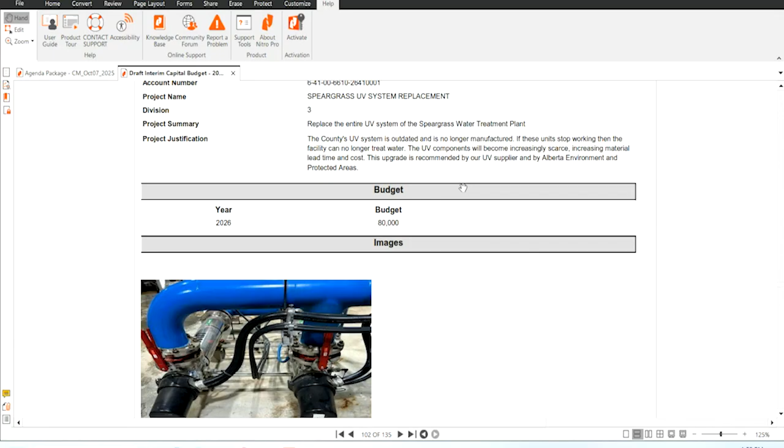Speargrass UV replacement, so the same story as Muirfield's. Speargrass UV system replacement is the same story. The UV system is no longer manufactured, and so trying to be proactive about it, we are looking to replace the entire UV system in Speargrass and Muirfield.

And that takes me to the end of water. Are there any questions? Not seeing any. Go ahead.

This is for water specific to Muirfield. There's nothing, there's no capital projects tied to this one.

And then now we're into sewer.

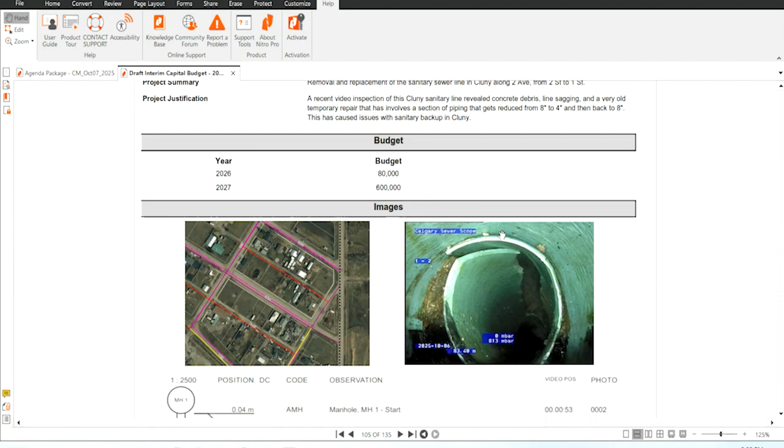So the first project here is the Cluny Second Ave wastewater line replacement. This is one that we had cameraed, and it came back revealing that there was quite a bit of line sagging and quite a bit of debris in the line. So this is going to be engineering for next year, and then the complete replacement of this line in the following year, 2027.

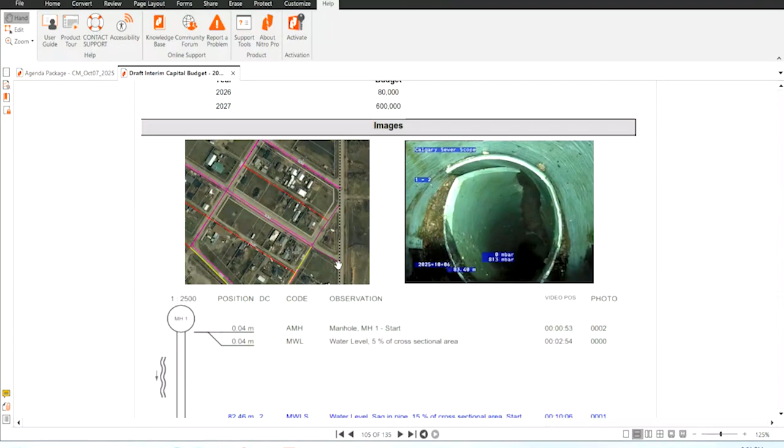And the big one here for the wastewater is the Muirfield Wastewater Lagoon. This project is currently wrapping up a bit of preliminary engineering, and administration is investigating a few locations and strategies for handling Muirfield's waste.

Next up is the Speargrass Lift Station Control Panel. This is located just southwest of the water treatment plant, and it communicates to that water treatment plant so that it can update its SCADA and all this.

So an alternative is that we can construct a little shed around it, but we think it's going to be cheaper just to dig a line and put it into the existing building.

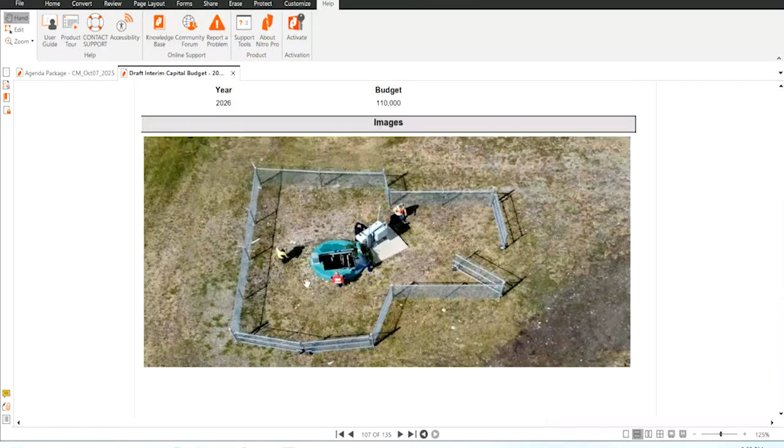And that's it for sewer. Is there any questions for sewer? Keith?

Just a question. I know there's a lot of discussion about corrosion, and water is a universal solvent. Are you taking a look at different materials in certain locations that would make sense? There's a lot of places that do that.

Through the chair, yeah, absolutely. It's something that we have our engineers review. They bring back a report on the feasibility of different materials and the different life expectancies, and it's all outlined in their report. And then from there is what we decide. They outline all the different options, and then we decide which option to go with and what makes the most sense.

All right, now passing it off to Cody for waste management.

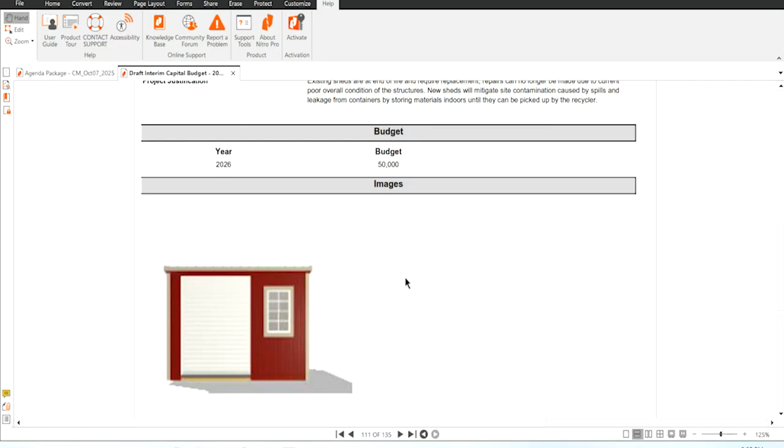The last one here is oil shed replacements. This is to replace the existing oil sheds at our transfer sites, which are currently basically livestock shelters, for lack of a better term. They're all pretty well end of life, falling down, not worth fixing anymore. We'll be looking to replace them with this style of building with a roll-up door, getting everything inside out of the weather so we're not getting contamination leaking on the ground and that sort of thing.

And that's it for waste.

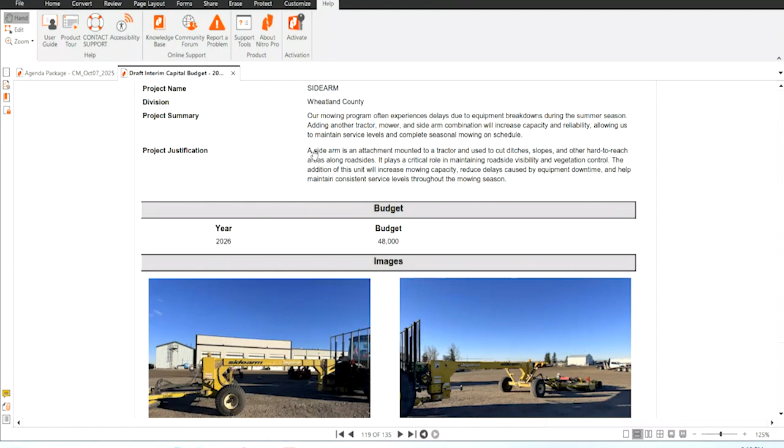This is the other capital project for the side arm for the mower unit, and then this last one is the tractor unit for that assembly as well. That brings us to the end of the Agricultural Service Board capital budget. I'm here for any questions.

Not seeing any. Okay, thank you.

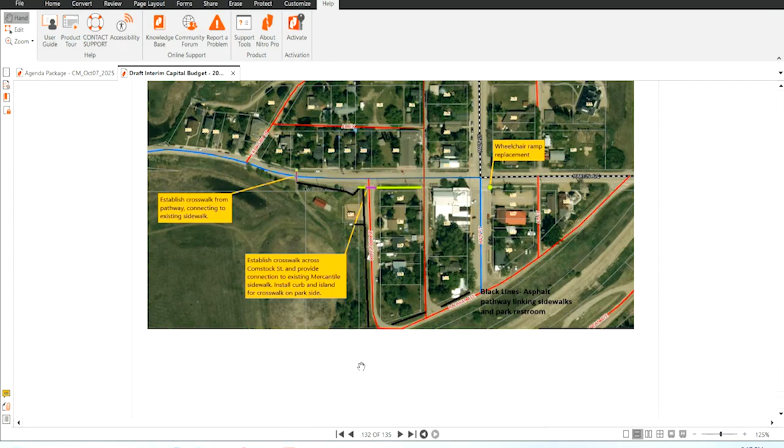Would that be in the future heated and water put in it, or what is there? Be like a holding tank in it now, or? Yeah, the site will be a prefab, so it'll be a holding tank and it'll be sat on top of that holding tank. So there's no plans for that,

unless council wants to give direction for that, it'll be a lot more expensive than that. Well, it's just the upkeep, I guess. But once you have water in it, the sewer's there, the water's there, everything's there.

Pump out is extra, right? Yeah, the pump out's extra, but it's a lot more cost in servicing and maintaining it year round with heat and water and stuff as well. So servicing costs will probably almost triple the cost of that project to service it.

How much difference have you worked it out, or? I could bring some back the next time this comes. I think I do have the cost roughly what it would be, but I'm guessing about 3 times. So let me see what - just so I had a number when I get asked.

So I had about 165. So I upgraded, okay, it'll be 250 for the pit toilet total. So I bet you it'll be double that to have it serviced. Okay.